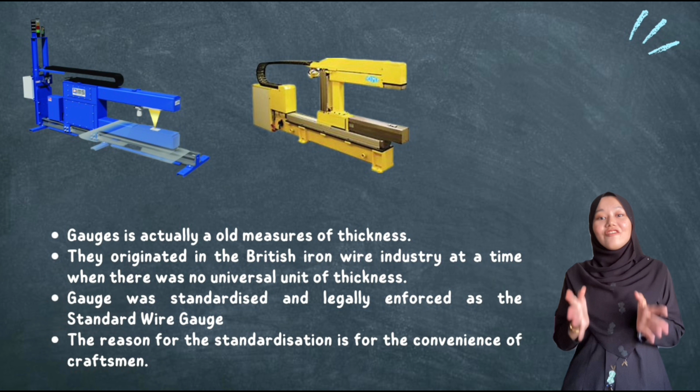First of all, let us know more about gauges. Gauges are actually an old measure of thickness. They originated in the British iron wire industry at a time when there was no universal unit of thickness. The sizes of the gauge numbers were the result of the process of wire drawing and the nature of iron as a substance. Gauges were measured and described in fractions of an inch during the 19th century. In the UK, one gauge was standardized and legally enforced as the standard wire gauge since it was not an unequivocal unit of length. One important reason for the standardization is for the craftsman's convenience.

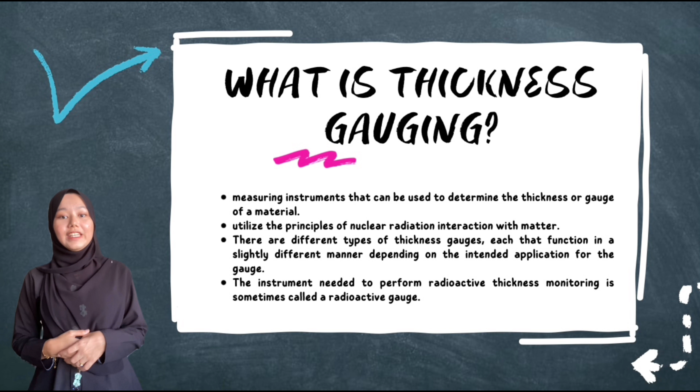So what is thickness gauging? Thickness gauges are measuring instruments that can be used to determine the thickness or gauge of a material. It is commonly known as a radiation-based thickness gauge or a nuclear thickness gauge. This type of gauge measures the thickness of materials by utilizing the principle of nuclear radiation interaction with matter. There are several different types of thickness gauges, each functioning in a slightly different manner depending on the intended application. The instrument needed to perform radioactive thickness monitoring is sometimes called a radioactive gauge.

Radiation-based thickness gauges offer advantages such as non-contact measurement, fast and continuous measurement, and suitability for various materials, including metals, plastic, and composites. They are commonly used in industries such as steel manufacturing, paper and pulp, plastic and coatings, where precise and non-destructive thickness measurements are required. It is used to control the thickness of the product by ensuring that the product or material has the same thickness and coating.

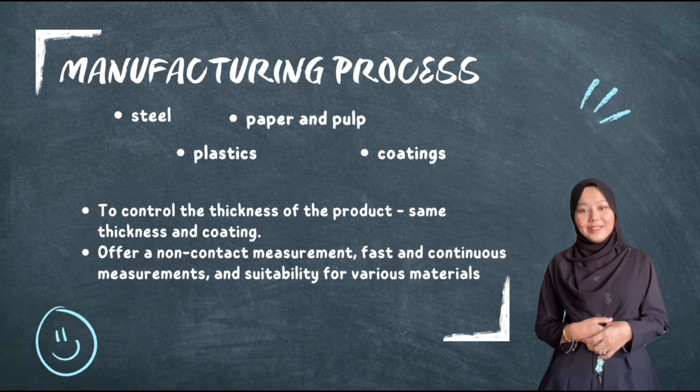Next, we are going to talk about the fundamentals of thickness gauging using radiation. It may sound complex, but don't worry, we'll break it down for you in simple terms. So why is this important?

Imagine you are working in the oil and gas industry and you need to measure the thickness of a pipeline to ensure its safety and reliability. Or maybe you are in the manufacturing industry and you need to ensure the quality of your product by measuring their thickness. This is where thickness gauging using radiation comes in handy, providing accurate and reliable measurement in a non-destructive way.

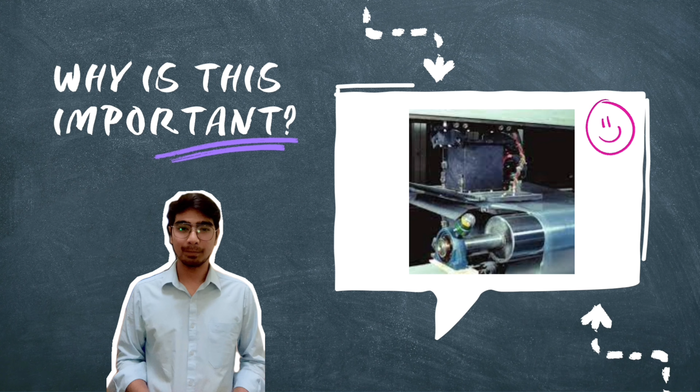So what is radiation? Radiation is a form of energy that travels through space and can penetrate various materials. It is commonly used in thickness gauging because different materials will absorb or scatter radiation differently depending on their thickness. There are 3 types of radiation commonly used in thickness gauging: beta, gamma, and X-ray. Beta radiation consists of fast-moving electrons, while gamma radiation is a type of electromagnetic radiation. X-rays are also a type of electromagnetic radiation, but with lower frequency than gamma rays. Each type of radiation has its own unique properties and application.

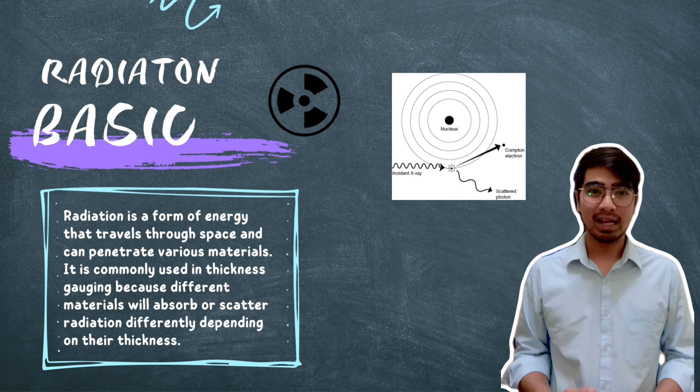Moving on to the types of radiation gauges. There are 3 main types of radiation gauges used for thickness gauging: beta, gamma, and X-ray gauges. Beta gauges use a radioactive source that emits beta particles, which are high-energy electrons, and these particles penetrate the material being measured and are detected on the other side. Gamma gauges use a radioactive source that emits gamma rays, which are high-energy photons, and these rays also penetrate the material being measured and are detected on the other side. For X-ray gauges, it uses an X-ray tube to generate X-rays, which are also high-energy photons, and the X-rays penetrate the material being measured and are detected on the other side. Each type of gauge has its own advantages and disadvantages, and is suited for different applications.

For example, beta gauges are often used for measuring the thickness of plastic film or sheeting, while gamma gauges are commonly used for measuring the thickness of steel or other metals.

X-ray gauges are typically used for measuring the thickness of materials that are difficult to penetrate, such as rubber or composites. Regardless of the type of gauge used, thickness gauging using radiation is a critical process in many industries, including manufacturing, aerospace, and construction.

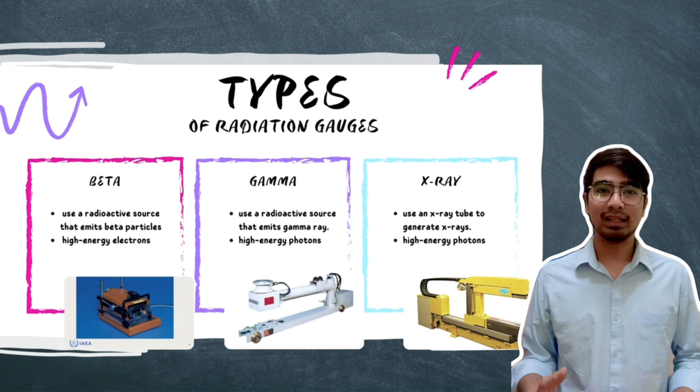For the theory of thickness gauging: in thickness gauging using radiation, the attenuation of radiation is a key concept. As radiation passes through a material, some of it gets absorbed or scattered.

This reduces its intensity, and the amount of attenuation depends on the material's density and thickness, as well as the type and energy of the radiation used.

By measuring the radiation intensity before and after passing through the material, we can calculate its thickness. The relationship between thickness and radiation intensity follows an exponential decay curve, where the intensity decreases exponentially with increasing thickness.

This relationship is described by the Beer-Lambert law, which states that the attenuation of radiation is proportional to the material's thickness and density.

By calibrating the gauge with known standards, we can accurately measure the thickness of unknown materials.

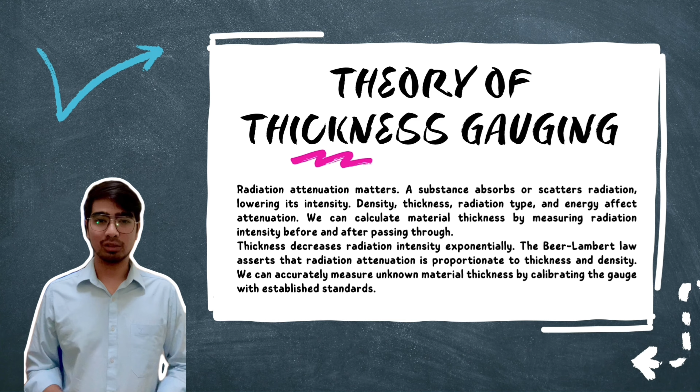Radiation-based thickness gauging has widespread application across numerous industries due to its ability to provide accurate and reliable measurement of material thickness. This section explores the various industrial sectors where radiation-based gauging is commonly employed.

Firstly, the steel industry. Radiation-based thickness gauges find extensive use in the manufacturing sector, particularly in metal production and processing. They are employed for measuring the thickness of metal sheets, coils, and plates during the manufacturing process.

Gauges ensure that products meet precise thickness specifications, resulting in high quality end products.

For example, to measure the thickness of steel sheets, coils, and plates. These measurements are crucial for quality control, ensuring compliance with industry standards and customer specifications.

This enables them to control the thickness within tight tolerances, resulting in improved product quality and reduced material waste.

Next, plastics and polymers. Radiation-based gauging is also valuable in the plastic and polymer industry. It enables manufacturers to accurately measure the thickness of plastic films, sheets, and extrusions.

This information is crucial for ensuring product quality and consistency and meeting customer requirements. This allows them to achieve consistent thickness across the entire roll, leading to improved product performance and reduced customer complaints.

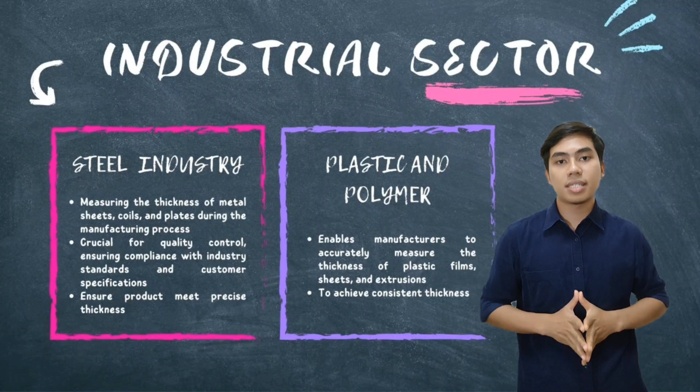Lastly, paper and packaging. The paper and packaging industry benefits from radiation-based thickness gauging for measuring the thickness of paper, cardboard, and various packaging materials.

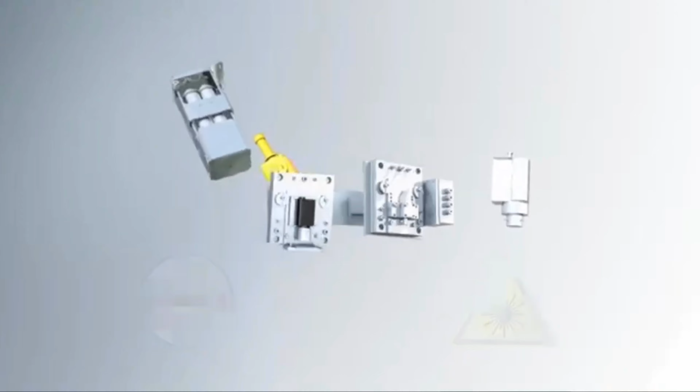Gauges enable manufacturers to maintain precise thickness control during production, ensuring uniformity and desired properties such as strength and flexibility. By maintaining consistent thickness, they achieve better printability, folding properties, and overall packaging quality.

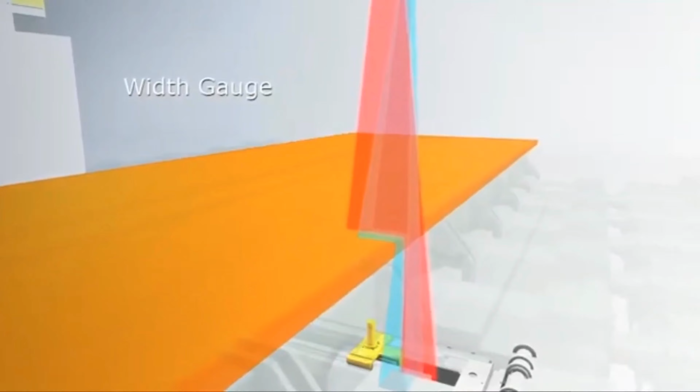For example, to measure the thickness of plastic film used for food packaging, pharmaceutical packaging, and other flexible applications. Precise thickness control ensures packaging integrity and barrier properties.

In conclusion, there are still more applications of thickness gauging using radiation in different sectors, such as medical and many more, which will be explained in detail in the next part.

Its benefits of non-contact measurement, high accuracy, and rapid measurement speed make it a valuable tool for ensuring quality control and process optimization.

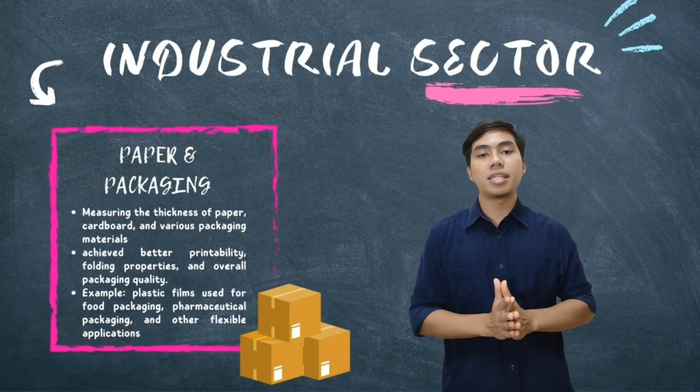This radiation-based thickness gauge offers several benefits, but I will just share 3 of them.

First, non-destructive testing. It is a non-destructive testing method, meaning it does not change or harm the substance being measured. This permits measurements that are accurate and trustworthy without affecting the quality of the object or structure.

Second, high accuracy. It gives accurate measurements, frequently with high degrees of precision. This makes them suitable for applications that require precise thickness control, such as manufacturing processes or quality control. Third, wide range of materials.

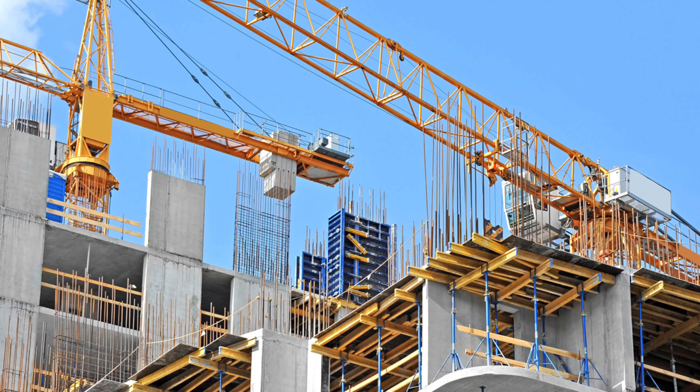It can be used on a wide range of materials, including metals, plastics, composites, and other materials. Due to how versatile it can be, it's used in a variety of sectors, including the petrochemical, construction, automobile, and aerospace industries.

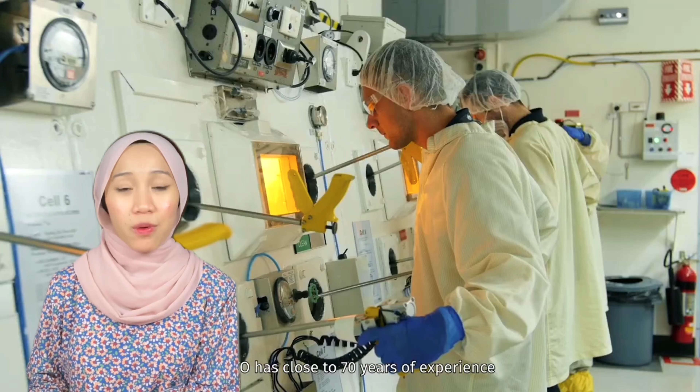Class, it is essential to remember that while radiation-based thickness gauging has many advantages, it should be carried out by qualified experts while following the right safety procedures to ensure proper handling of radiation sources while decreasing potential risks. Now that you know the benefits of thickness gauging using radiation, let me explain the principle behind it.

Beforehand, let me briefly explain the devices. There are various devices used for thickness gauging using radiation. The specific device depends on the type of radiation being used and the application requirements.

Here are some common devices used for thickness gauging: X-ray thickness gauge, gamma ray thickness gauge, beta backscatter gauge, and last but not least, neutron gauge. These are just a few examples of devices used for thickness gauging using radiation. The choice of device depends on factors such as the type of radiation, the material being measured, the required accuracy, and safety considerations.

But for today, we'll just focus on one device only, which is the first one, the X-ray thickness gauge. Now, let's dive deeper into the principle of work.

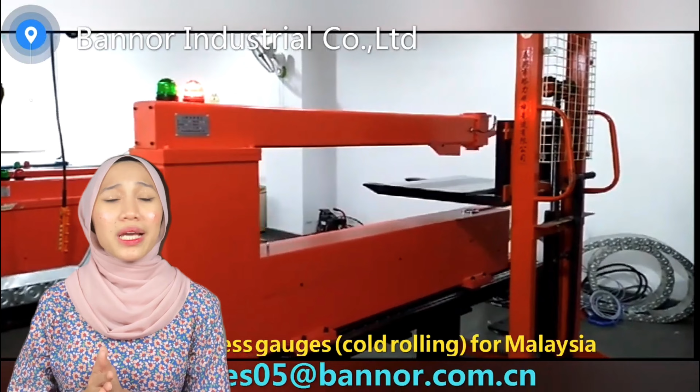This is the X-ray thickness gauge in industry. I guarantee you can see nothing from this scene due to the radiation that we couldn't see with our naked eyes. So, here you go, the animated one.

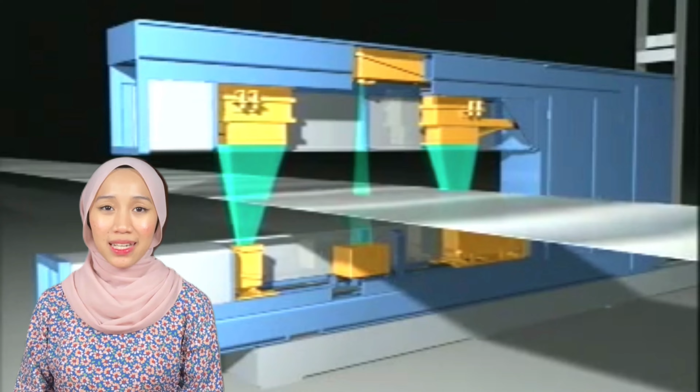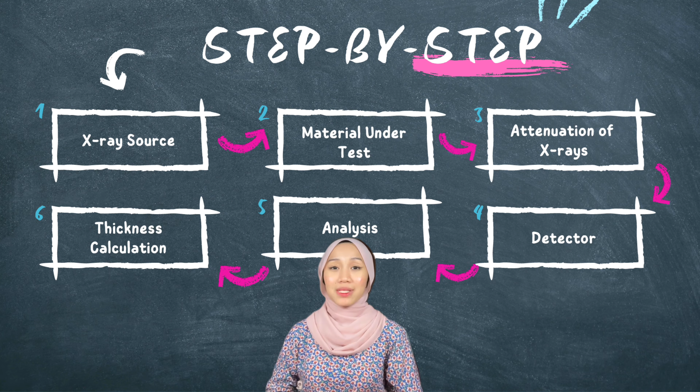So how does it actually work? Here is a step-by-step explanation. Look at this flowchart. We have 6 important steps. First, X-ray source. Second, material under test. Third, attenuation of X-rays. Fourth, detector. Fifth, analysis. And last but not least, 6, thickness calculation.

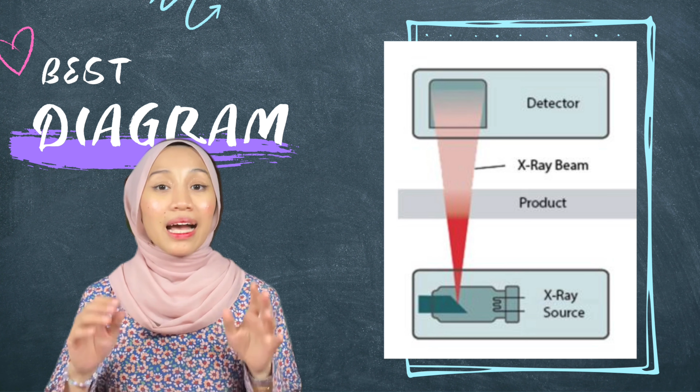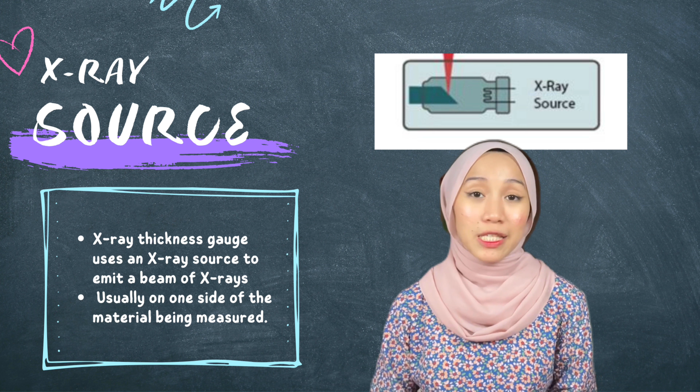Now, by using this diagram, let's go one by one. First, X-ray source. The X-ray thickness gauge consists of an X-ray source which emits a beam of X-rays. The source is typically positioned on one side of the material being measured.

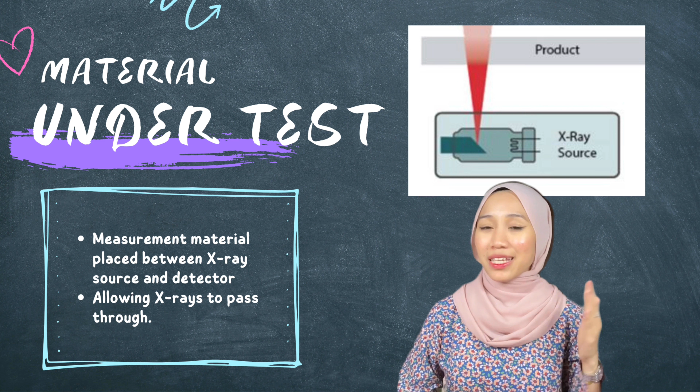Second, material under test. The material whose thickness needs to be measured is placed between the X-ray source and the detector. The X-ray passes through the material.

Third, attenuation of X-rays. As the X-rays penetrate the material, they undergo attenuation. Attenuation occurs due to the absorption and scattering of X-rays by the atoms and electrons present in the material. The degree of attenuation is dependent on the material's density and thickness.

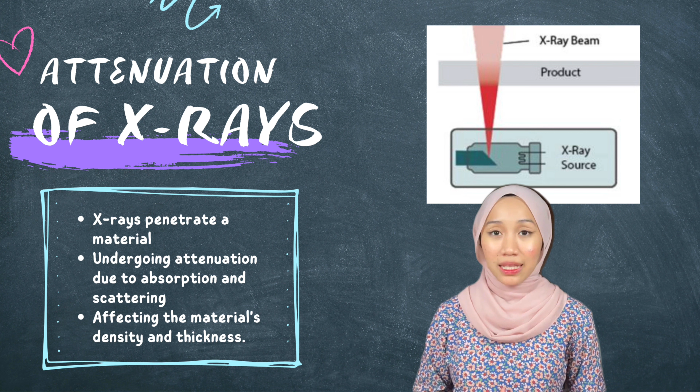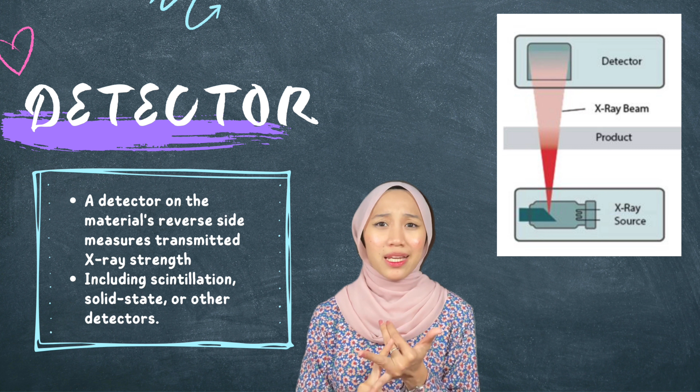Fourth, detector. To determine the strength of the transmitted X-rays, a detector is positioned on the material's reverse side. The detector could be a scintillation detector, a solid-state detector, or another appropriate X-ray detector.

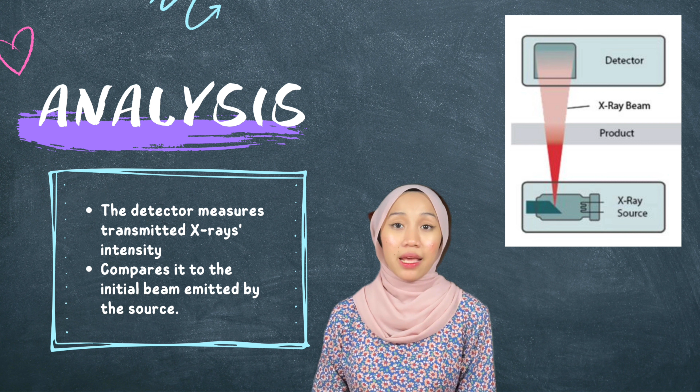Fifth, analysis. The detector measures the intensity of the transmitted X-rays. This measured intensity is compared to the initial intensity of the X-ray beam emitted by the source.

6, thickness calculation. The amount of X-ray attenuation can be calculated by comparing the differences in intensity. The thickness of the material and the attenuation level are correlated. In order to convert the measured intensity into thickness values, a calibration chart or mathematical model is used.

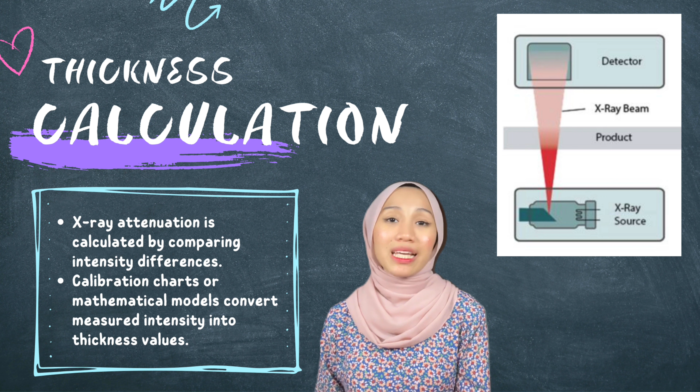The calibration process involves measuring material thickness using an X-ray source and detector setup and creating a reference curve or calibration chart. This relates the measured X-ray intensity to the corresponding thickness. By exposing unknown materials to the beam and analyzing the transmitted X-ray intensity, the material's thickness can be determined.

Last from me, keep in mind that the implementation and components of an X-ray thickness gauge may vary depending on the device and application. Safety precautions and regulations for handling X-ray sources are also important considerations to ensure operator safety and compliance with radiation safety guidelines.

So, as what has been discussed, we know that a thickness gauge is a measuring instrument that can be used to determine the thickness or gauge of a material. Because of its function in helping people standardize the thickness of material, it is widely used in manufacturing processes.